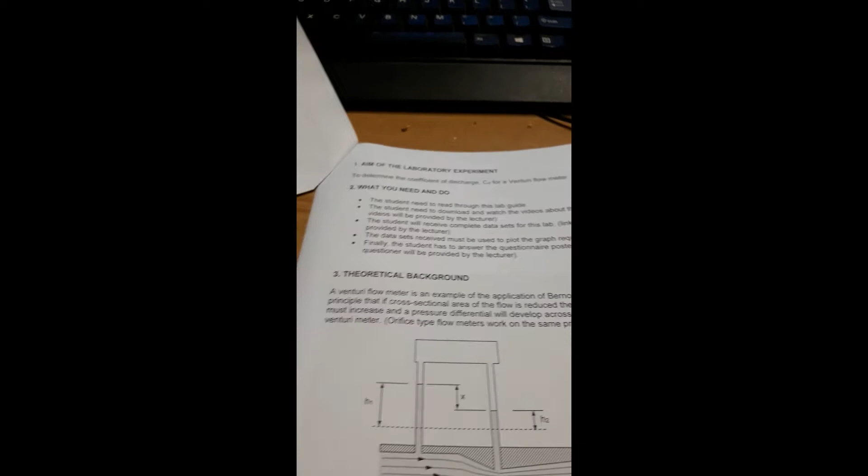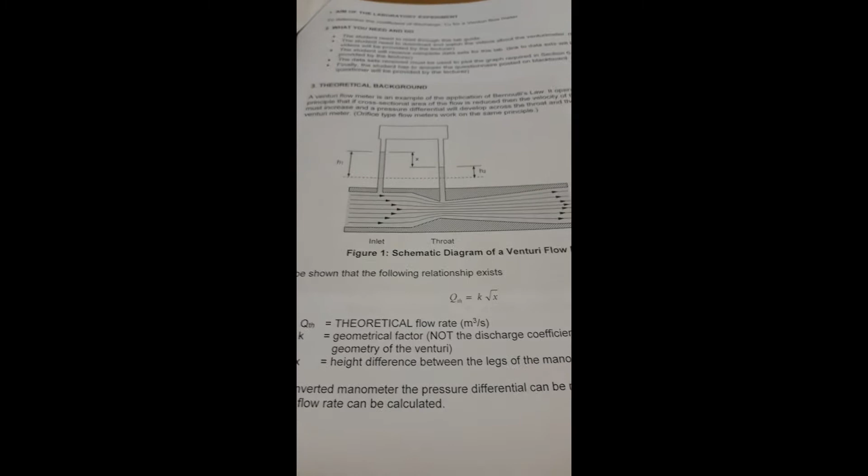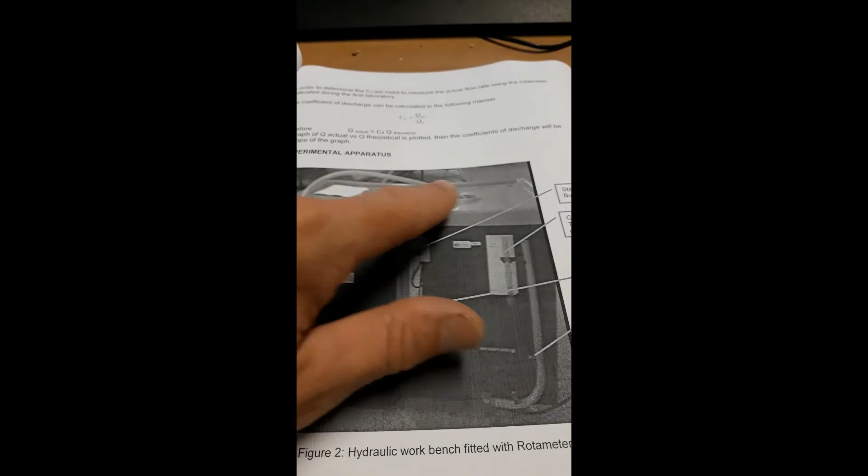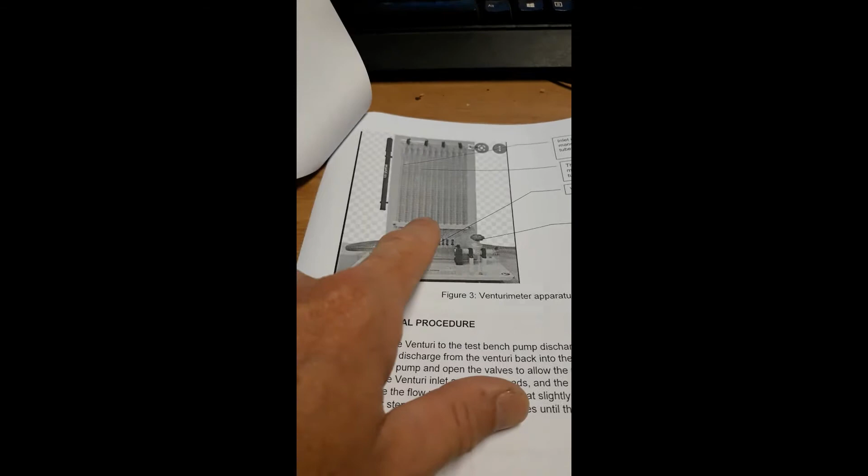Then we have some theoretical background and the diagram of the Venturi, and an explanation of the schematic. Next we have the experimental apparatus. There you can see the workbench again, where the Venturi will be connected to. And there's the Venturi itself with all its parts, sitting here at the bottom part, and that's the inverted manometer. Then we have the experimental procedure and the results.

There's a quick explanation of what we want in the results, and some formulas for you to guide. The next is a sample of the data table you will receive. There you can see it's the inlet head, throat head, rotameter float height, time to fill 5 liters, head difference, actual flow rate, and theoretical flow rate. At the bottom is a description of what data you will receive, raw data, and which data needs to be calculated.

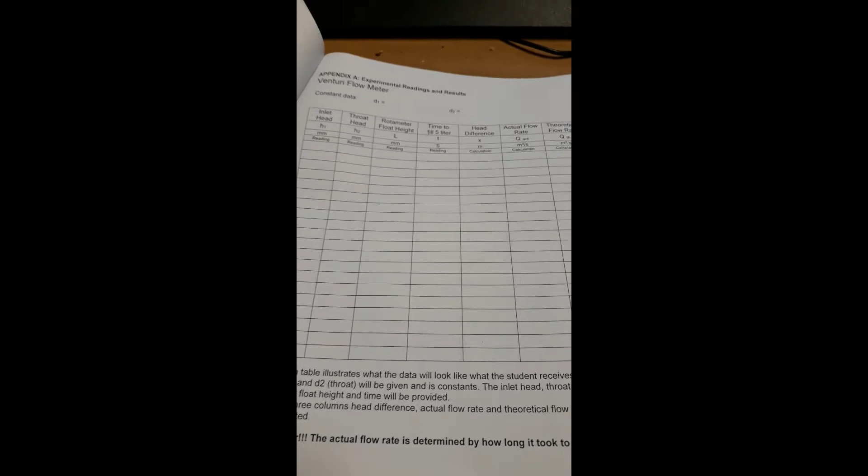And then on the last page there is some further reading and an example of the results we need.

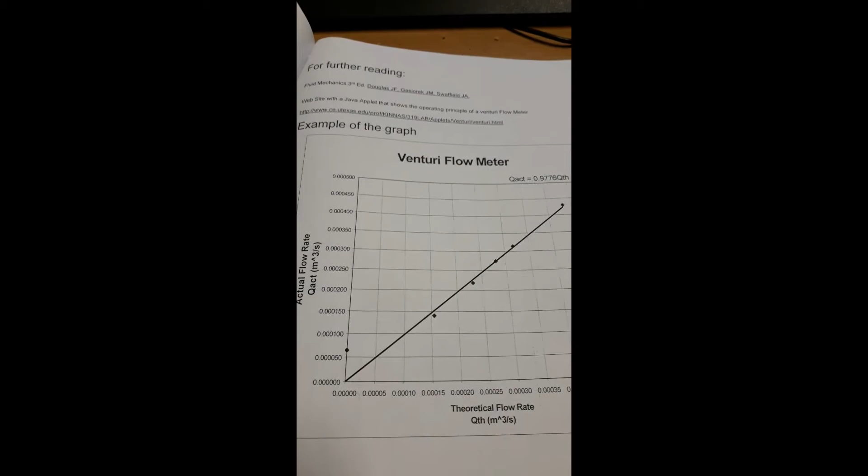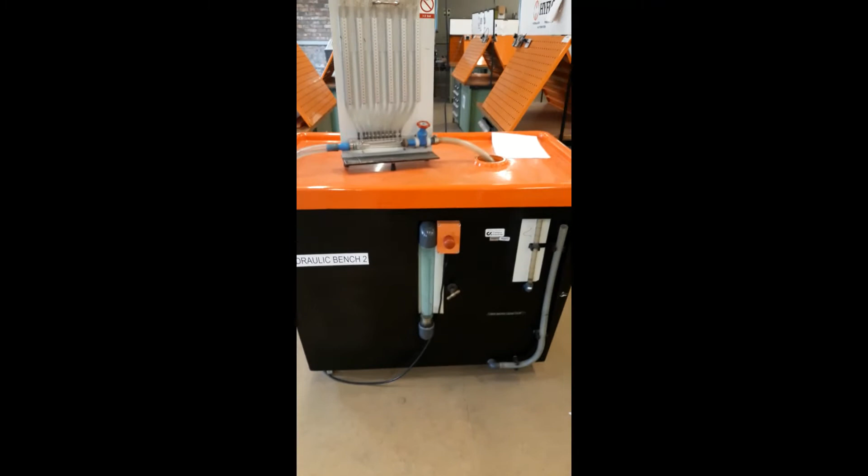The equipment we're going to use for the Venturi Meter Lab - again we're going to make use of the hydraulic workbench with the rotameter fitted to it. If you have any questions related to the rotameter and how we capture the flow, please refer to the video on rotameter calibration. That will go through all the steps.

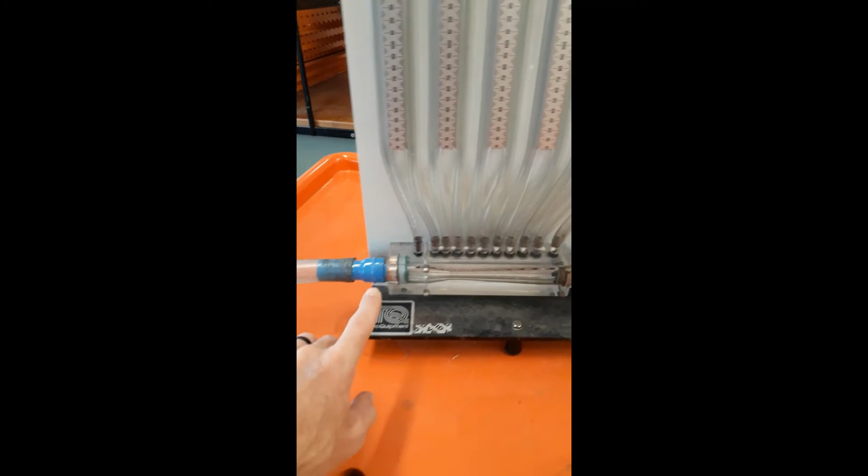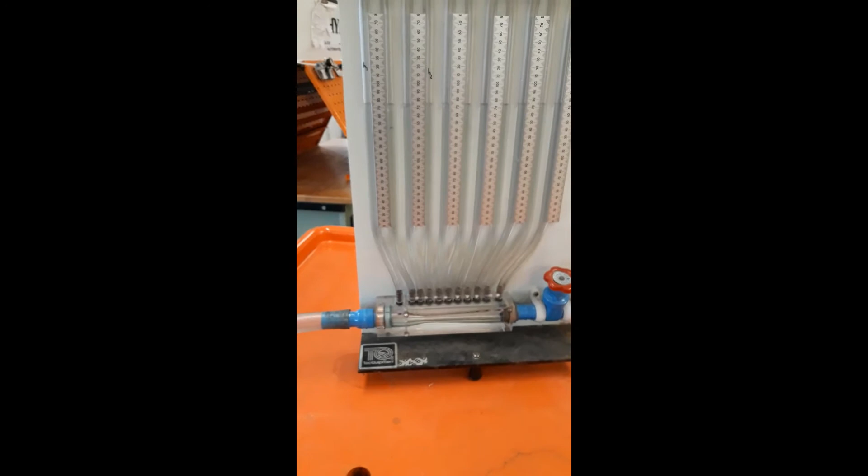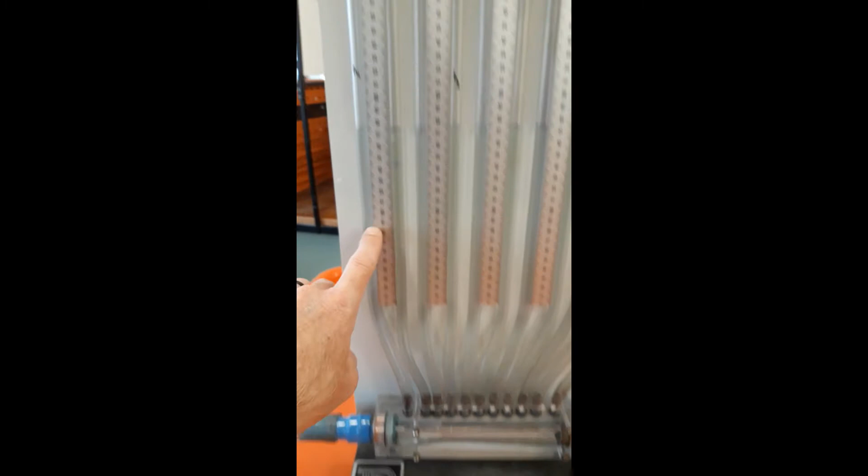Connected to the outlet pipe of the pump is the Venturi meter, this bottom part over here. Then we have the control valve, and the pipe drains into the small basin, which allows us to do flow measurements. Now connected to the Venturi is an inverted manometer, and the two points we're interested in this lab are the inlet of the Venturi, marked H1, and the throat, marked H2.

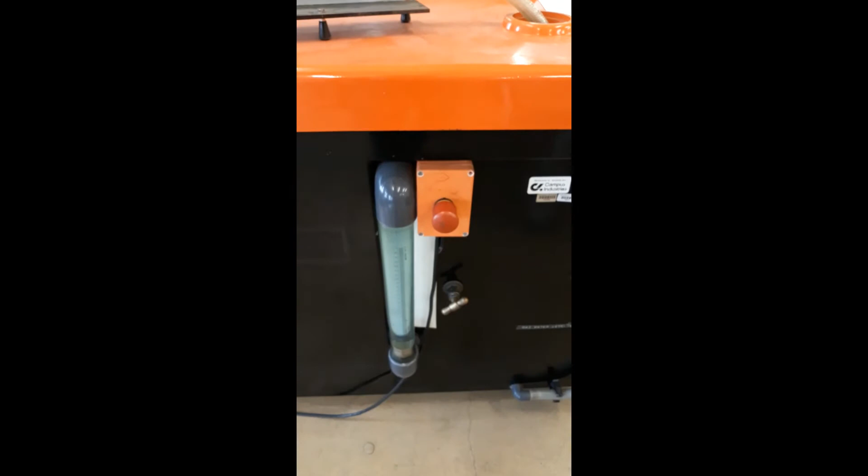Currently the control valve of the rotometer is fully closed, and you can see that the pressure in the inlet and the pressure at the throat is exactly the same, because there's no flow through the system. The purpose of this lab is to determine the discharge coefficient for the Venturi, and for that I'm going to show you the procedure to capture the data needed.

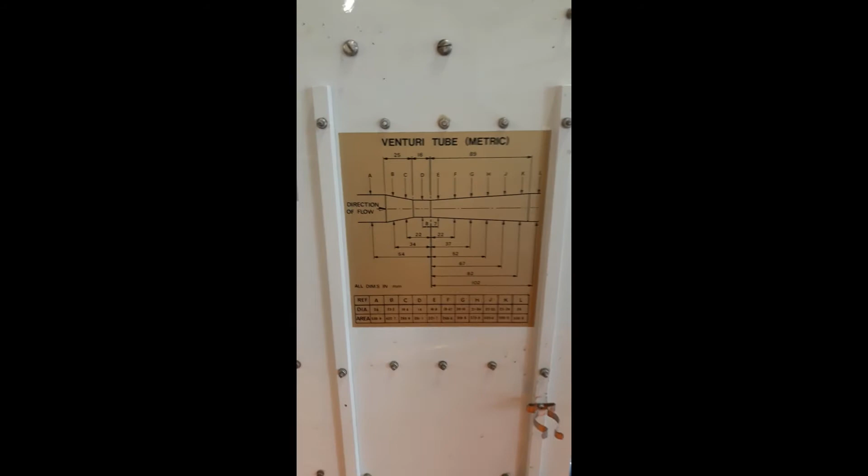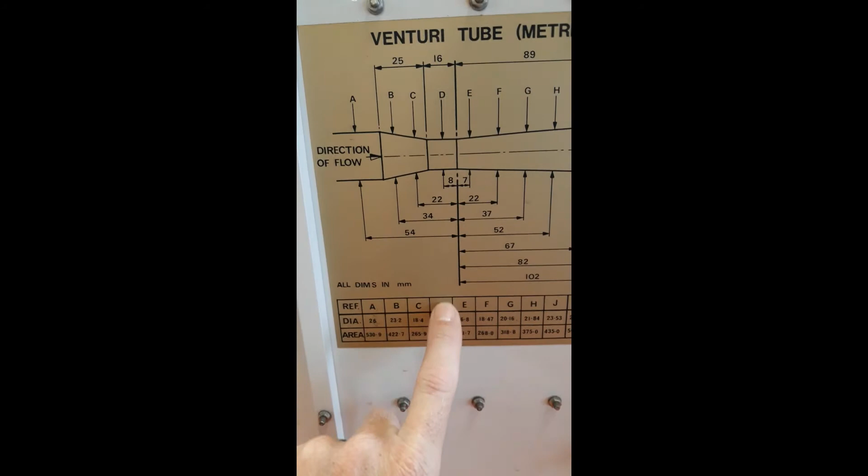For the Venturi Meter Lab, we also require these constants at the back. We're going to be interested in the inlet, we need the diameter and the area of it, and we're going to look at the throat, and we're going to need the diameter and the area of it. All these constants will be provided in the data set you will receive for this lab.

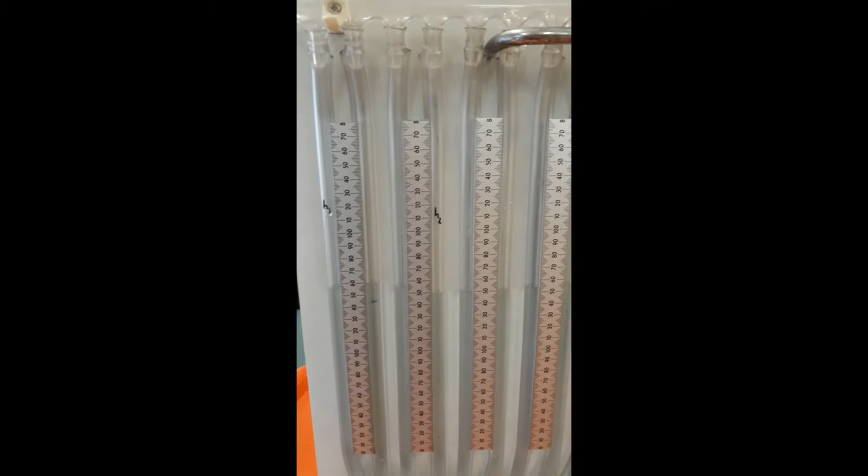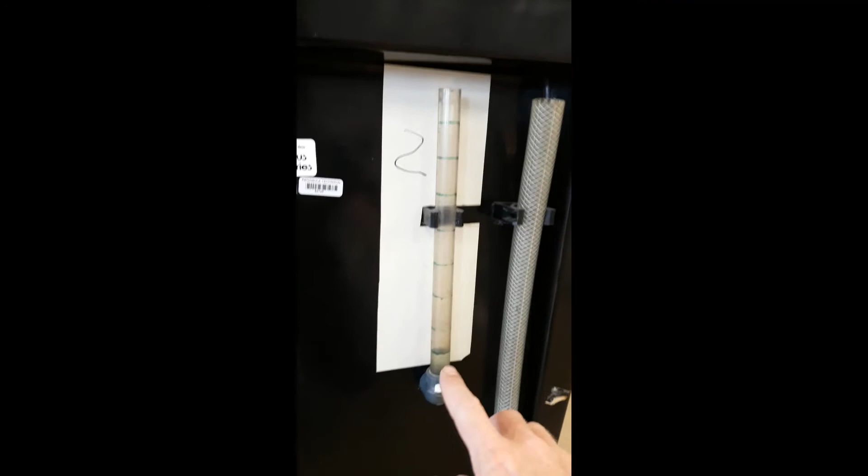We need to capture the height of H1 in millimeters, and the height of H2, also in millimeters. Then we need to measure the flow exactly the same way we did during the rotameter calibration, by closing up that small basin inside. We're going to look at the sight glass and measure how long it takes to fill 5 liters of water. Remember, these segments are marked in 5 liter segments.

So the water will rise, I start my stopwatch, and I stop my stopwatch. Then I know how long it took to fill 5 liters of water, and I can calculate my flow in liters per second. If the water is a bit bouncy, wait for it to settle, and you might have to take a reading from this line to that line. It doesn't matter which increment you use, as long as your water level is stable.

Once we've done that, we're going to set our rotameter on 20 millimeters - we will do increments of 20 millimeters. Again, we take our inlet head reading in millimeters and our throat head in millimeters. Now you can see the head difference is changing as more flow goes through the system. And again, we measure our flow and do our next step.

We jump 20 millimeters on the rotameter, and again we take our reading for inlet and for throat, and we measure our flow for that increment.

All the raw data and constants required to do this lab will be provided by your lecturer. Data sets will consist of your inlet head, your throat head, and the flow for the specific rotameter float height reading.